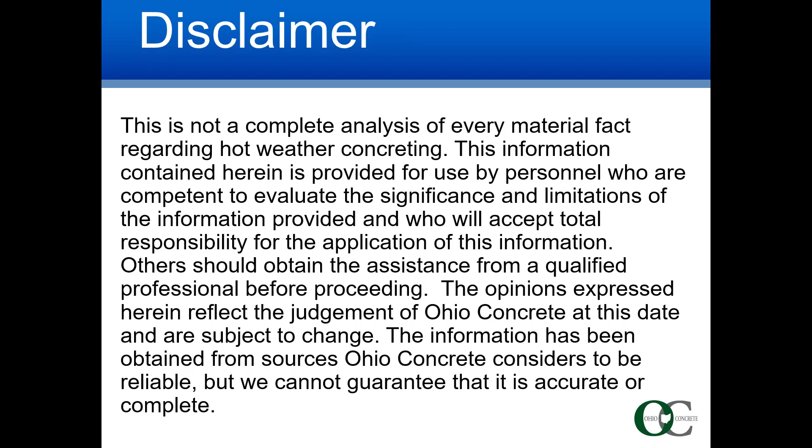The presentation will discuss the hot weather impacts for the producer, contractor, and tester, which is going to cover defining what hot weather concreting is, the effects of high temperatures on concrete, cooling concrete methods and mix design adjustments, project planning and best practices, finishing problems such as plastic shrinkage cracking and drying shrinkage cracks, as well as curing and protection, reduction of concrete strengths, and testing procedures.

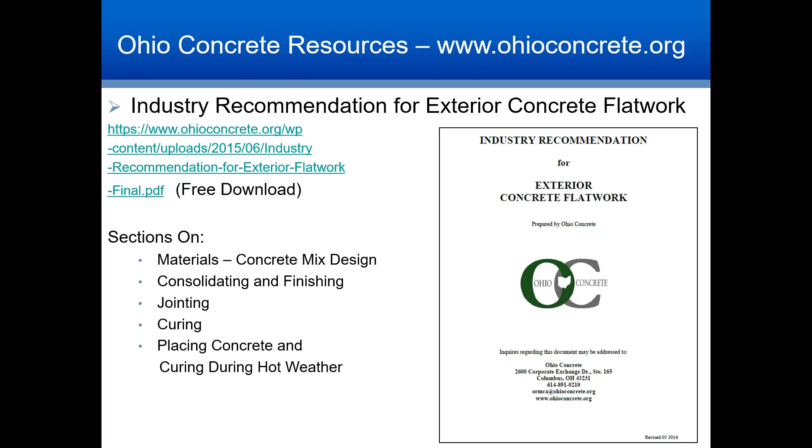Let's start with the how, when, and why hot weather is defined in contract documents. The first place to look is the project specifications, as this is the contract document which includes the requirements of the work. Often, concrete industry codes are referenced in contract documents, such as the ACI or American Concrete Institute codes 318 as well as 301.

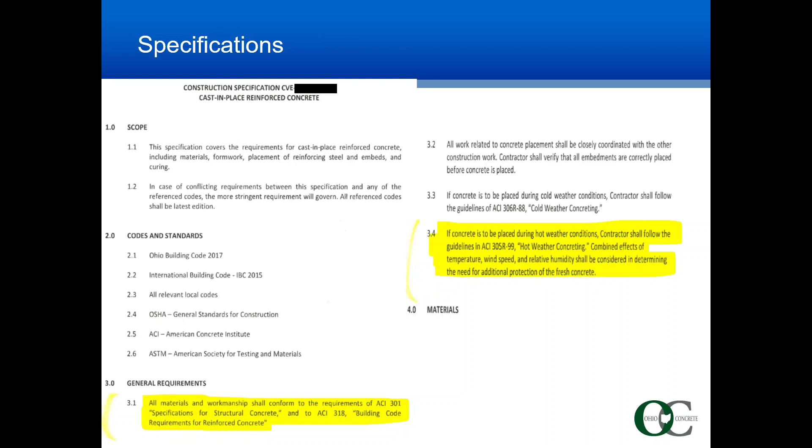There are hot weather provisions that are defined that further reference ACI 305.1, which is the specification for hot weather concreting. I'll now turn this over to Mark, where he will review ACI 305.1, which is the specification, as well as the report that further details hot weather concreting. Take it away, Mark.

Okay, thank you, Tom, and good morning to everyone. We'll be looking at ACI 305.1-14. This is the specification for hot weather concreting, and especially sections 1 and 3.

Section 1, general, includes a definition of hot weather concreting and submittal requirements. Note there is a requirement for a pre-placement conference 15 days prior to beginning concrete construction to review hot weather concreting properties. Attendance at this meeting shall include contractor representatives, subcontractor, testing agency, pumping contractor, the engineer of record, and the ready-mix producer.

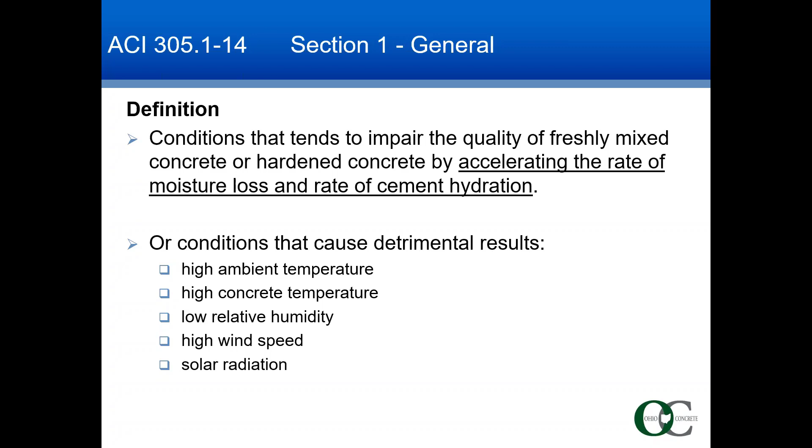Per ACI, the definition of hot weather concreting is conditions that impair the quality of fresh concrete or hardened concrete by accelerating the rate of moisture loss and the rate of cement hydration, or essentially conditions with high ambient temperatures, high concrete temperature, low relative humidity, high wind speed, and solar radiation.

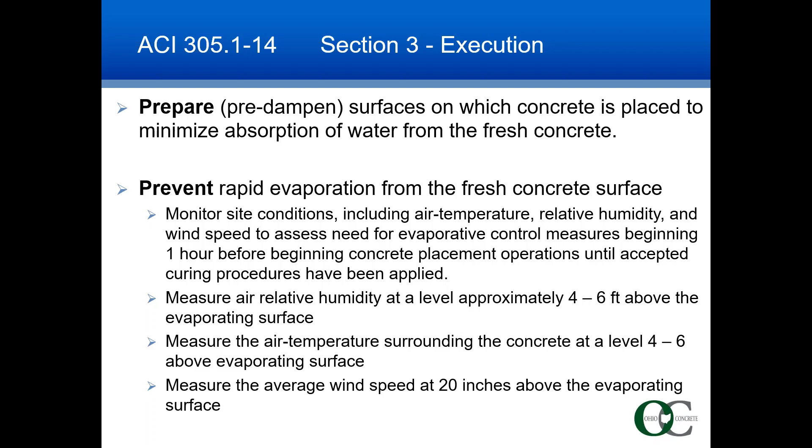In Section 3, Execution, ACI describes preparations, such as dampening the subsurface before concrete is placed, to prevent evaporation from the concrete surface, by monitoring the site conditions. They are air temperature, relative humidity, wind speed, and temperature of fresh concrete at time of discharge.

The maximum temperature of fresh concrete at the time of placement is 95 degrees, and this maximum has been adopted by ODOT specifications. The request for a maximum fresh concrete temperature exceeding 95 must be supported by pre-construction testing, shall require materials similar to those proposed for use on the project and under similar conditions.

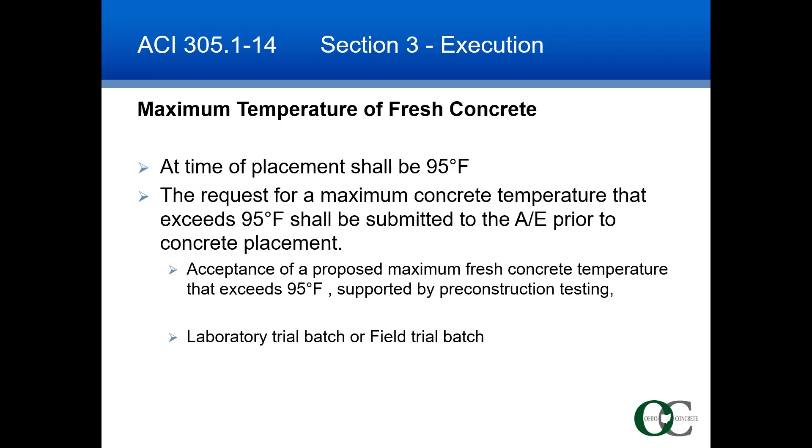Concrete production methods to reduce concrete temperatures include cooling the aggregate stockpiles, chilling the mix water, and in some extreme cases using liquid nitrogen.

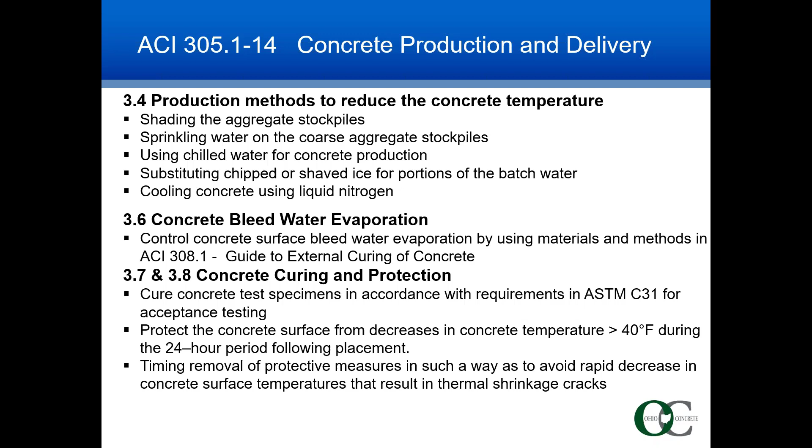Reference is made to ACI 308 Guide to Curing to control surface bleed water evaporation, and the curing requirements of standard test specimens for acceptance for ASTM C31, and protecting the concrete surface from rapid temperature decreases to avoid thermal shrinkage cracks. When the rate of evaporation of the bleed water exceeds 0.2 pounds per square foot per hour, precautionary measures such as windscreens or fogging are recommended.

Use the nomograph to estimate the surface evaporation rate. Enter with the air temperature, 85 degrees, move up to the relative humidity at 20%, and continue clockwise. Move right to the concrete temperature, 80 degrees, and down to the wind speed at 10 mph. Now move left and read the approximate evaporation rate.

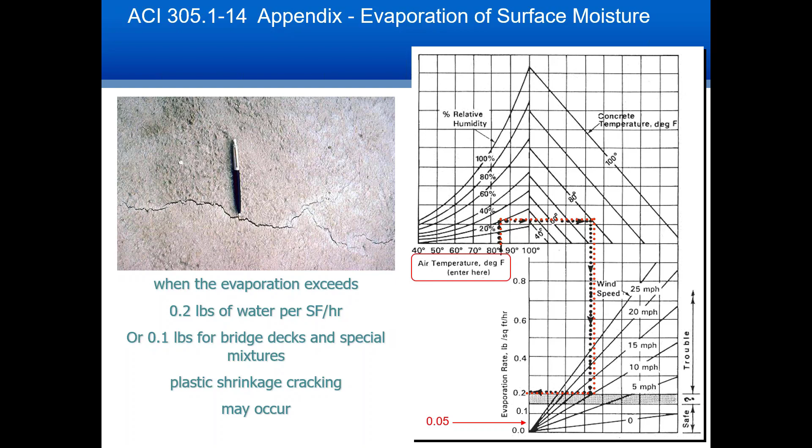With some concrete mixtures, such as those containing certain pozzolans, cracking is possible even if the evaporation rate is below 0.1 pound per square foot per hour. Concrete containing silica fume is particularly prone to plastic shrinkage cracks because of a lack of bleed water. Cracking can develop with evaporation rates as low as 0.05 pounds per square foot per hour.

A professional environmental meter allows one to measure the instantaneous evaporation rate rather than going by weather data from nearby stations. For example, wind gusts at a specific job site location may play a significant factor in the evaporation rate calculation. Data logs can be transferred to a mobile device wirelessly or to a computer.

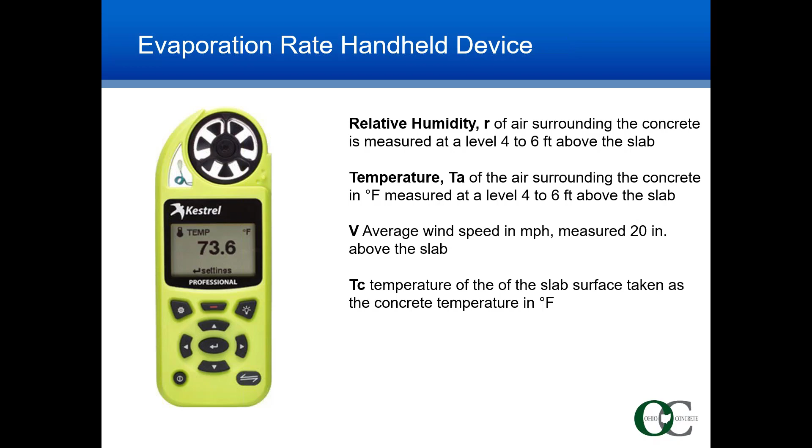This model has the ACPA evaporation rate nomograph built in and displays the evaporation rate on the screen with no calculations required by the user.

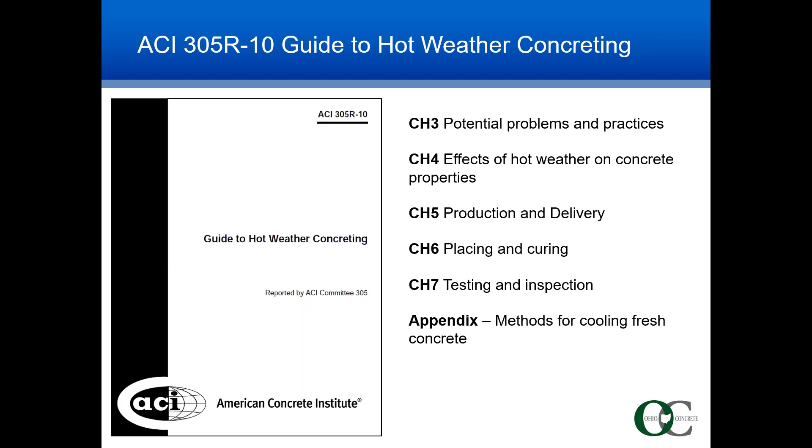Another important document is ACI 305R-10 Guide to Hot Weather Concreting. This report provides detail on potential problems and practices, effects of hot weather on concrete properties, production and delivery, placing and curing, testing and inspection. The appendix includes methods for cooling the fresh concrete.

Potential problems in hot weather: in the fresh concrete, there is an increased water demand, an increased rate of slump loss, an increased rate of setting, increased tendency for plastic shrinkage and thermal cracking, difficulty in controlling air entrainment, and reduced abrasion resistance.

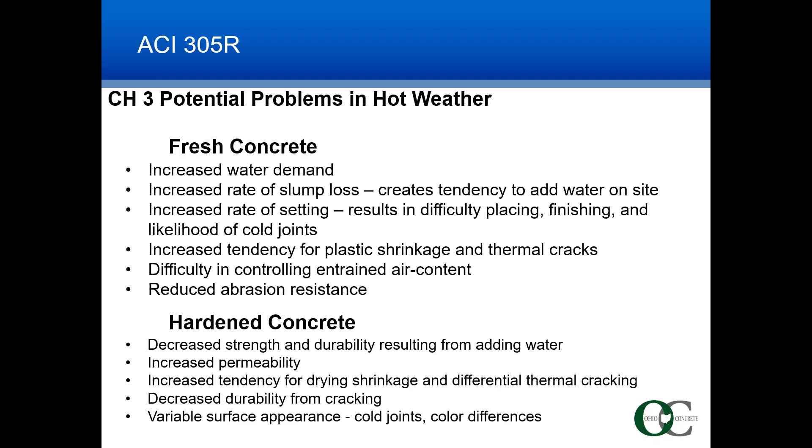In the hardened concrete, there can be a decrease in strength, decrease in durability resulting from additional water, increased permeability, increased tendency for drying shrinkage and differential thermal cracking, decreased durability from cracking, and variable surface appearances such as color differences or cold joints. Higher temperatures accelerate formation of cement bonds, but reduce the quality of those bonds.

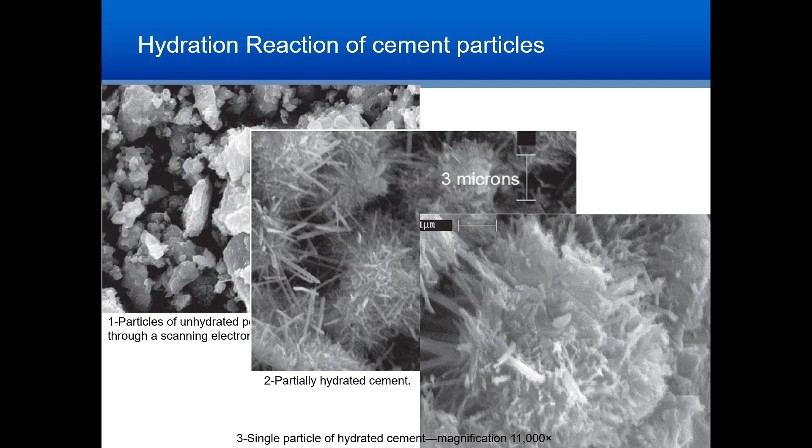These microscopic views depict different degrees of cement hydration. 1 shows particles of unhydrated cement, 2 is partially hydrated cement, and 3 is a single particle fully hydrated. Proper curing procedures ensure that sufficient water is available for the degree of hydration necessary to achieve the desired concrete properties.

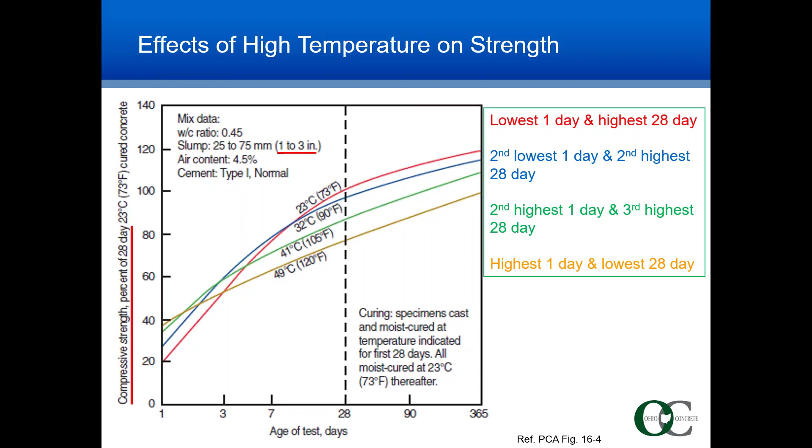The proper fabrication, curing, and testing of compression test specimens during hot weather is critical. Steps should be taken to assure ASTM C31 procedures are followed, specifically the initial curing temperature for test specimens.

Consider the batch water required to hold a 3-inch slump with increasing concrete temperatures. As concrete temperature increases, there is a loss in slump that often is compensated for by adding water to the concrete at the job site. At higher temperatures, a greater amount of water is required to hold the slump constant.

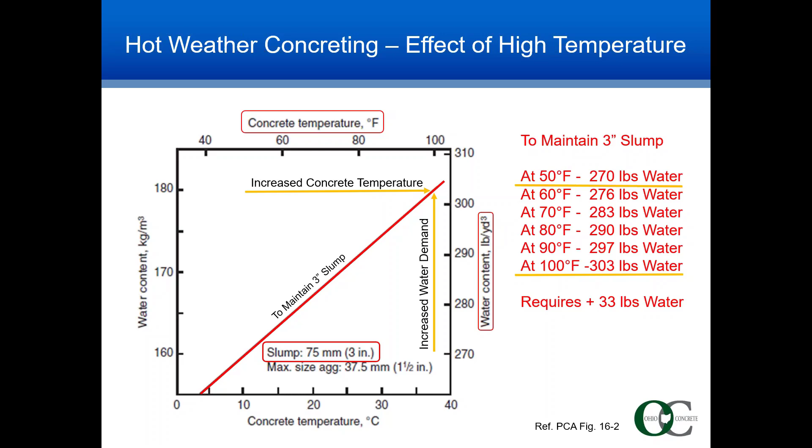High temperatures in fresh concrete increase the rate of setting and shorten the length of time for which concrete can be transported, placed, and finished. As a general rule of thumb, the concrete set time changes about 33% for every 10-degree change in the initial concrete temperature.

Air entrainment is also affected in hot weather. At elevated temperatures, an increased amount of air entraining admixture dosage is required to maintain a given air content. Concrete that contains slower setting cements is more likely to exhibit plastic shrinkage cracking if not protected. The cement content shown should be kept as low as possible, but sufficient to meet strength and durability requirements.

The inclusion of fly ash or slag cement should be considered to delay setting time and mitigate the temperature rise from heat of hydration. Water-reducing admixtures can offset increased water demand and strength loss that could result from higher concrete temperatures.

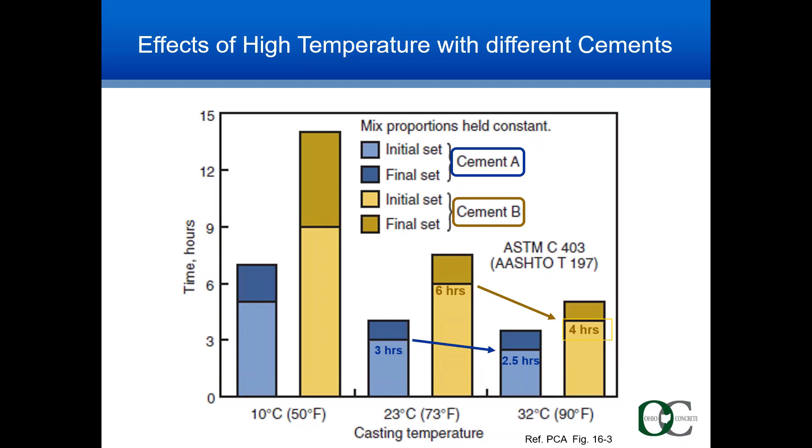The usual method of cooling concrete is to lower the temperature of the concrete ingredients before mixing. The aggregates have the most pronounced effect on concrete temperature because they represent 70 to 80% of the total mass.

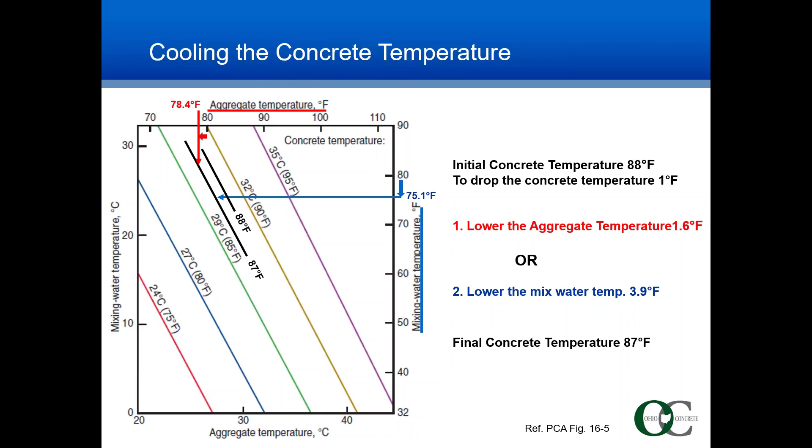This graph shows the effect of aggregate and mixing water temperatures. For example, assume the initial concrete temperature is 88 degrees. The ingredients are cement at 150, aggregate at 80 degrees, and water at 80 degrees. To drop the concrete temperature 1 degree, you could either reduce the aggregate temperature 1.6 degrees or reduce the mix water temperature 3.9 degrees Fahrenheit.

Methods of cooling fresh concrete include: A, sprinkling water on the aggregate stockpiles; B, cool misting the drums; C, crushed ice charged into the truck mixer; and even D, liquid nitrogen being added directly into the central mix drum or the mixer drum. What about the mixer drum color?

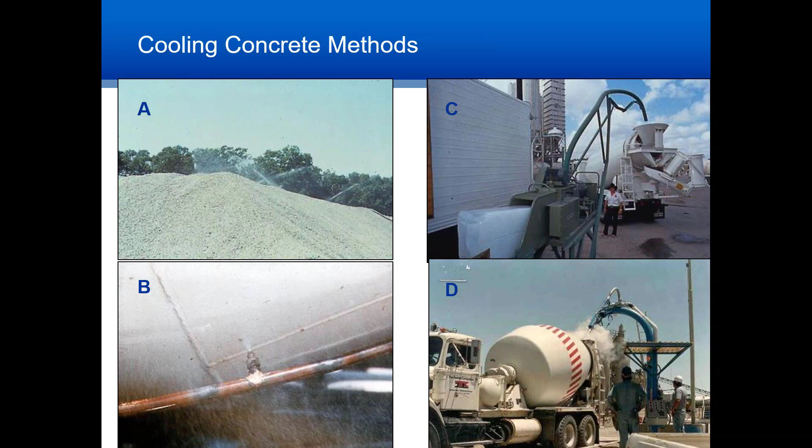Lighter mixer surfaces such as white minimize solar heat gain, which helps reduce the concrete temperature. Based on a 1-hour delivery time on a hot, sunny day, concrete in a clean white mixer drum should be 2 to 3 degrees cooler than in a black or red mixer drum, and a half degree cooler than in a cream-colored drum. Another rule of thumb: in order to reduce the temperature of fresh concrete 1 degree, reduce the aggregate's temperature by 1.6 degrees, or water by 4 degrees, or cement by 9 degrees.

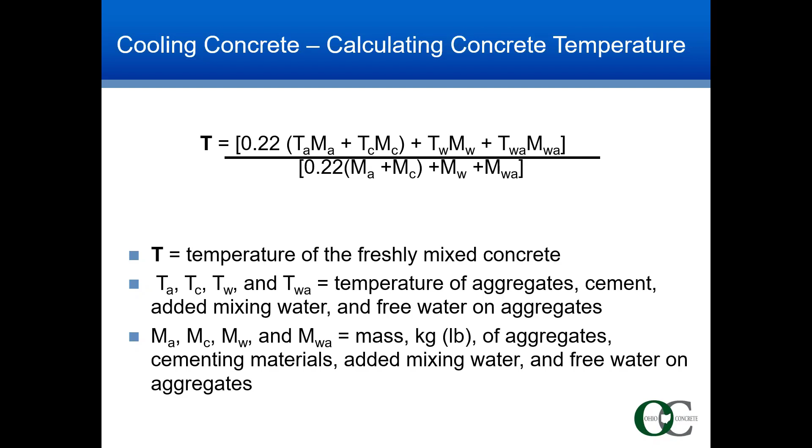The approximate concrete temperature can be quantified from the temperatures of its individual ingredients using this equation, where T is the temperature of the fresh mixed concrete, and the T's with subscripts are the temperatures of the individual materials: aggregates, cement, added mixing water, and free water on the aggregates. The M's represent the mass of these individual ingredients.

Heat generated during cement hydration raises the temperature of the concrete to an extent that depends on the cement content. As a general rule, cement hydration temperature rises 5 to 15 degrees for every 100 pounds of cement. At 96 degrees, for example, cement is hydrating at 2 times the typical laboratory rate at 73 degrees and will cut the set times in half.

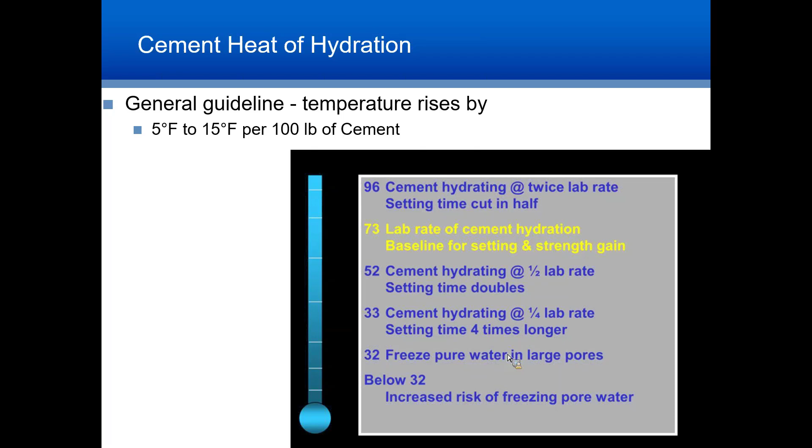Batch plant applications: select materials and mix proportions that have proven performance, such as lower cement contents and set retarding admixtures. Cool the concrete or one or more of its ingredients; coarse aggregates will have the greatest impact. Use a concrete slump that allows rapid placement and consolidation, which likely requires a plasticizer. Add fibers to the concrete mix.

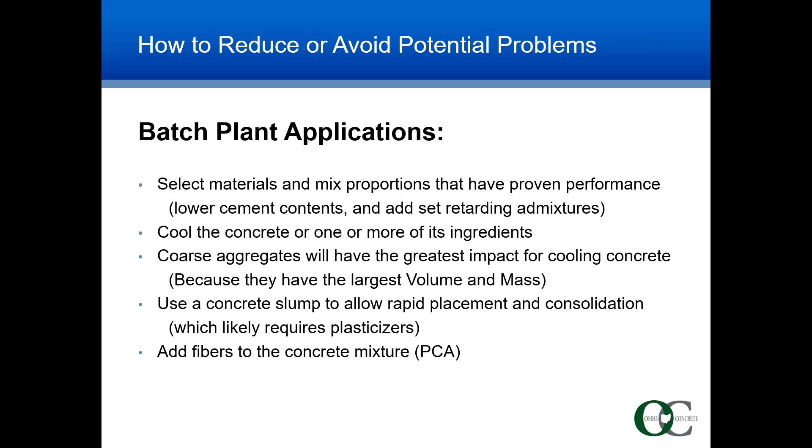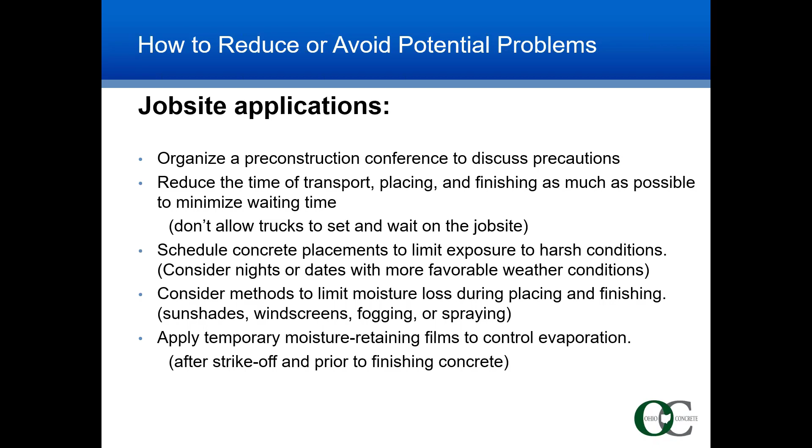Job site applications: organize a pre-construction conference to discuss the precautions. Reduce the time of transport, placing, and finishing. Minimize waiting time; don't allow trucks to sit on the job site. Schedule concrete placements to limit exposure to harsh atmospheric conditions, considering nights or other dates. Consider methods to limit moisture loss during placing and finishing, such as sunshades, windscreens, fogging, or evaporation spraying. Apply temporary moisture retaining films to control evaporation after strike-off and prior to finishing. Schedule placements when walls and roof structures are in place.

What is wet curing? Well, what is curing? First of all, it's the maintaining of an adequate moisture content and temperature in the concrete at early age so it can develop properties the mixture was designed to achieve.

Don't let it dry out for at least 3 days. Apply curing immediately after finishing. And there is the greenhouse effect caused by plastic sheeting, which can result in visible discoloration streaks.

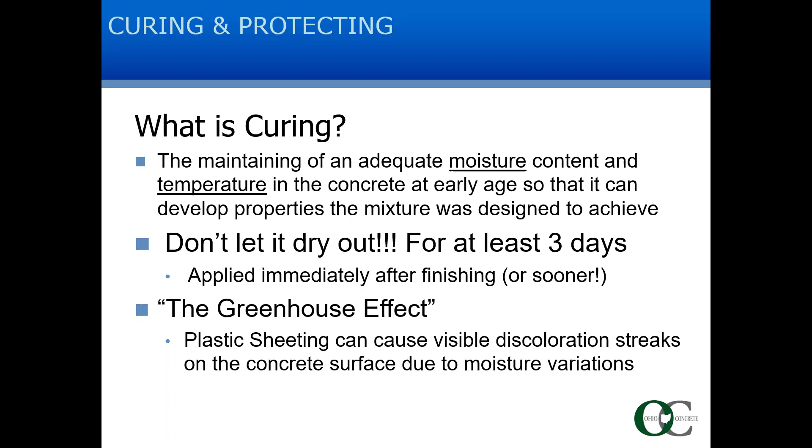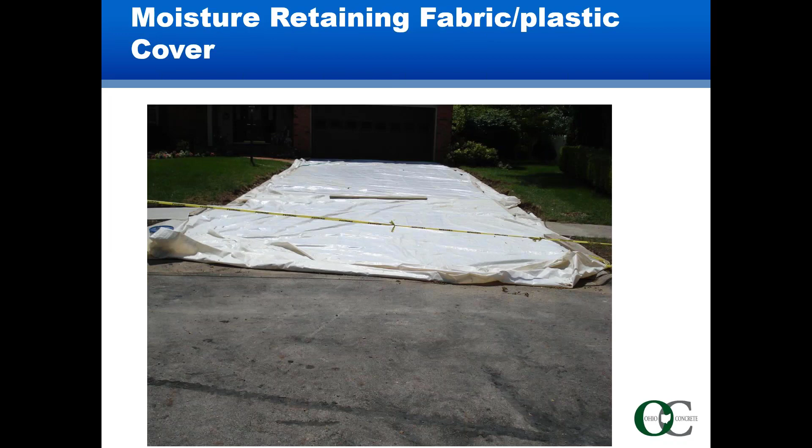Wet curing, however, is the most desirable type of curing, but not always practical. Plastic sheets with soaker hoses is a good option. White fabric covers keep the moisture in and reflect the solar heat. Use a white pigmented reflective compound where concrete will be exposed to the sun.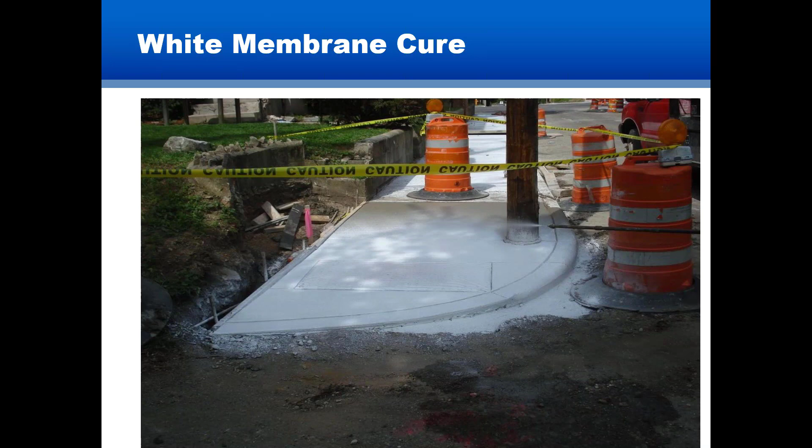Coverage should be thick enough so that it's not spotty. Apply curing compound immediately after finishing. Be sure to coat all exposed areas, including edges.

The need for moisture curing is greatest during placement and the first few hours after finishing. Curing water should not be more than 20 degrees cooler than the concrete itself. Otherwise, cracking can result from thermal stresses due to temperature differentials between the concrete and the cure water.

Continuous moisture curing for the entire curing period is preferred. However, if moisture curing cannot be continued beyond 24 hours, while the surfaces are still damp, the concrete should be protected from drying with curing paper, heat-reflecting plastic sheets, or membrane-forming curing compounds. If this is not practical, a curing compound should be applied immediately after final finishing to keep the concrete surface moist. Avoid repeated wetting and drying of the concrete surface.

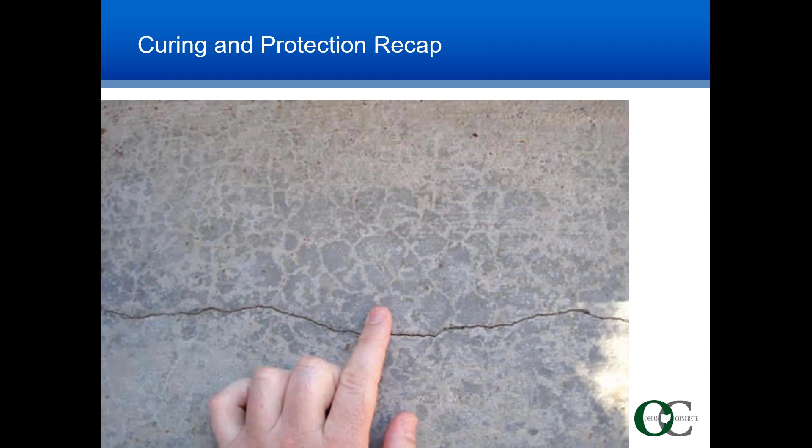Crazing is a pattern of fine cracks, shown here, that do not penetrate much below the surface and is caused by minor surface shrinkage. To prevent crazing, start curing as soon as possible.

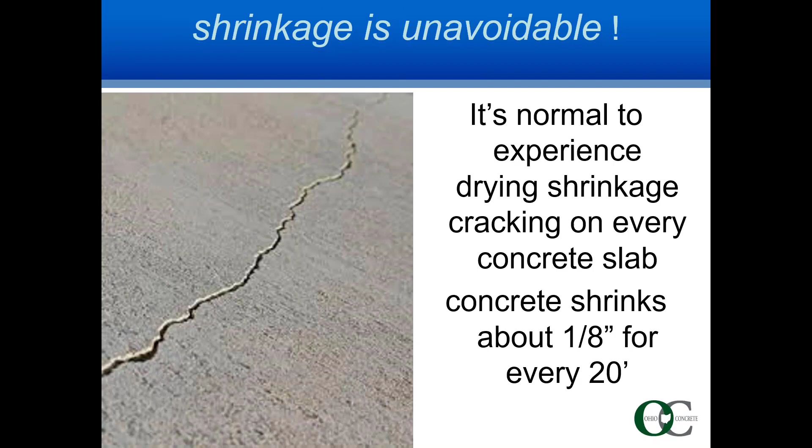How to minimize the risk of unanticipated cracks. Well, shrinkage is unavoidable. It's normal to experience drying shrinkage cracking on every concrete slab. Concrete shrinks about 1/8 inch for every 20 feet approximately. All concrete shrinks, and as concrete shrinks, it cracks.

So we plan for this by using isolation joints and contraction joints to accommodate shrinkage as the concrete volume changes. A restraint mechanism that prevents the concrete from shrinking results in a crack. A random crack is merely one that occurs outside of the planned joint.

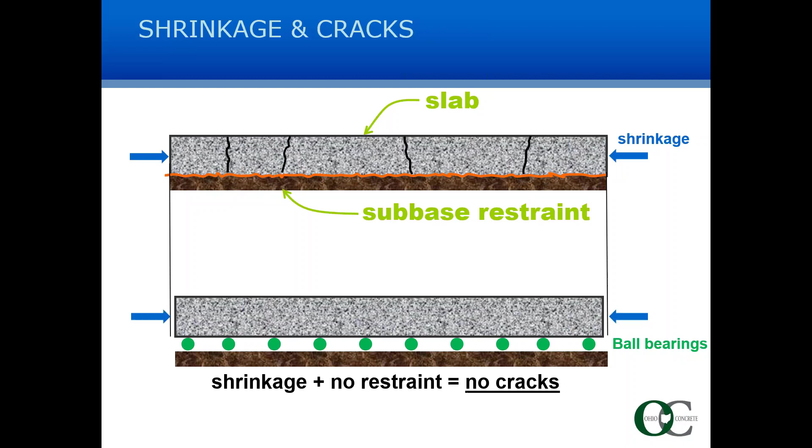In general, use concrete with a moderate slump, not over 5 inches. Avoid retempering concrete to increase the slump before placement, as this will increase shrinkage. Start curing as soon as possible to prevent rapid drying shrinkage.

Plastic shrinkage cracking is usually associated with hot weather concreting. However, it can occur anytime ambient conditions produce rapid evaporation of moisture from the concrete surface. Plastic shrinkage cracks sometimes occur in the surface of freshly mixed concrete soon after placement, during finishing, or shortly thereafter. These cracks occur when water evaporates from the surface faster than water can travel to the surface during the bleeding process. This condition creates rapid drying shrinkage and tensile stresses in the surface that often result in short, irregular cracks.

The following conditions, individually or collectively, increase evaporation of surface moisture, increasing the possibility of plastic shrinkage cracking: high cementitious contents, low water-cement ratios, high concrete temperatures, high air temperatures, low humidity, and wind.

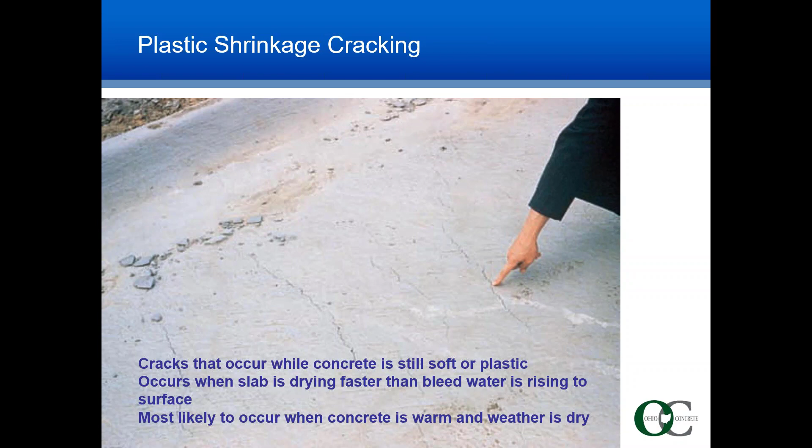How to minimize plastic shrinkage cracking: provide proper equipment and manpower, fogging and misting, or using evaporation retardants. Dampening the subgrade. Setting up wind barriers. Using synthetic fibers. And adjusting the set time to minimize plastic shrinkage cracking.

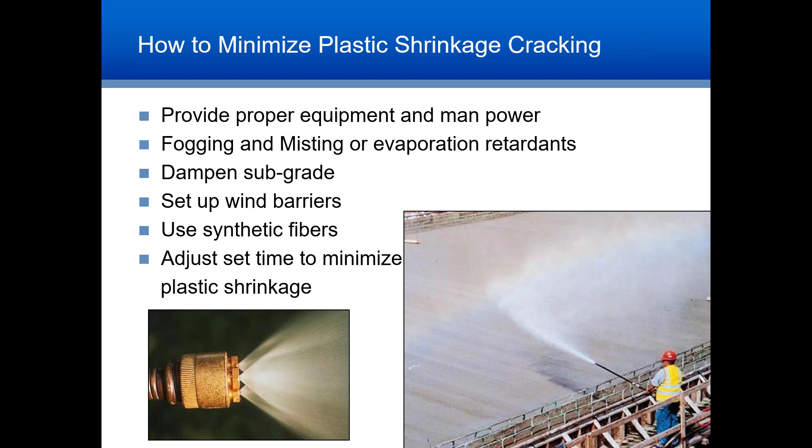As has been presented, temperature has a major effect on setting time of concrete. Concrete placed under elevated temperatures will set more rapidly and therefore need faster finishing. This also has a pronounced impact on strength, where early strength of concrete is higher, but later, say 28-day strength results will not be as high as concrete cured at around 70 degrees Fahrenheit.

It's therefore critical that concrete placed during hot weather is cured as quickly as possible. Curing needs to be continuous and, as Mark had said, for at least 3 days. Covering the placement with water, wet burlap, plastic sheeting, or liquid membrane curing compound. The benefit of using a white pigmented compound not only allows an indication of the coverage, but it also reflects the heat from the surface, from the sunlight.

Also, any test specimens that are cast need to be protected and stored under proper temperatures as required for ASTM C31.

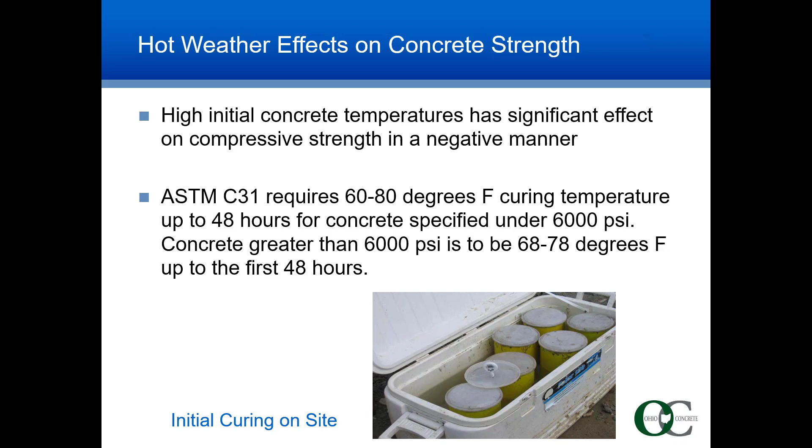Let's go ahead and take a look at concrete specimens. For ASTM C31, there are really two different purposes for casting field specimens. One test is to determine the strength potential for the concrete as it's been delivered to the job site, and the other is for determining the strength of the concrete in place at a given time. Both tests are covered under C31, and the one big difference between the two test procedures is the method of curing required for these specimens.

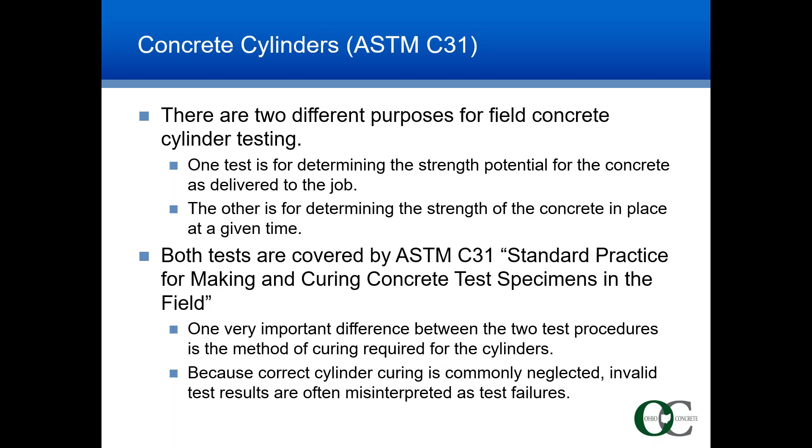Because correct cylinder curing is commonly neglected, invalid test results are often misinterpreted as test failures. So let's take a look first at the standard cured specimens. The first purpose of the cylinder testing is really to confirm that it meets the project specifications for strength.

That is, concrete that is delivered to the job site will meet the design strength, which is typically at 28 days. This procedure requires that those specimens that are cast remain on the job site for at least 24 hours, typically no longer than 48 hours, and they're stored in a temperature environment between 60 and 80 degrees Fahrenheit when the concrete strength is less than 6,000 psi, or at a higher temperature, 68 to 78 degrees Fahrenheit, for strengths equal to or greater than 6,000 psi. But again, the key here is that we're keeping those specimens in that set environment.

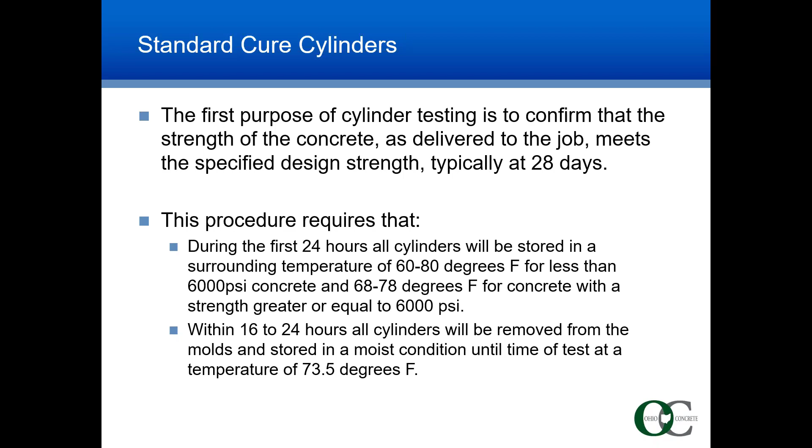Then within 16 to 24 hours, the cylinders, or certainly no longer than 48 hours, are removed from the job site, taken back to typically the lab, where they're demolded and stored in a moist condition, in a moist cure room or a cattle tank of lime water, at a temperature of 73.5 degrees Fahrenheit in a very standardized method.

Now, field cured specimens are for a different purpose. This is to confirm that the concrete that has been cast on the project site is strong enough for the next step to occur on the project, whether that is putting the concrete into service, whether contractors can start traveling equipment on it, or really getting to the next sequence of their construction cycle.

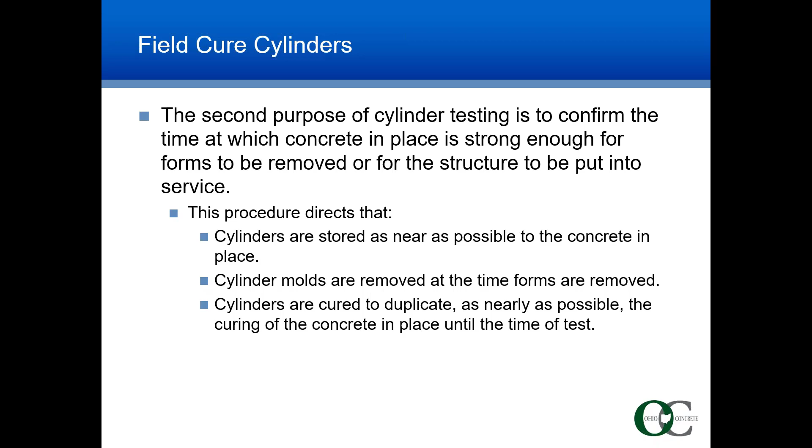So these cylinders are protected in or as near as possible to the concrete as placed. The molds are then removed at the time the forms are removed. So really, we're trying to duplicate the concrete specimens being under the same condition, or nearly the same condition, as the concrete that's placed at the job site. So two very distinct reasons why we are casting specimens.

Let's recap some of the items we've covered on hot weather concreting. Warm, moist conditions are actually ideal for durable, strong concrete. We want to enhance and create hydration of the cement. However, when we get into hot, dry, windy conditions, they can create problems.

As we've detailed, some of the solutions include cooling the ingredients that make up the mix, using mixes that have been adapted for high temperatures. Those include using supplementary cementitious materials such as fly ash or slag cement, or using liquid retarders.

The consistency also needs to allow for rapid placement and consolidation. Transport, placement, consolidation, and finishing with the least amount of delay. Maybe trying to reduce the exposure during hot weather, starting early in the morning or placing at night. Very common for the bridge decks here in Ohio.

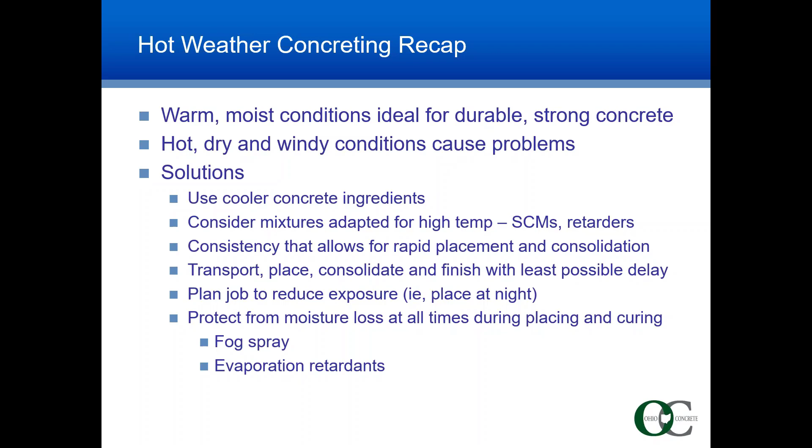Protect this placement from moisture loss at all times during placement and curing. This includes fog sprays and evaporation retardants.

Some conclusions: placing, finishing, and curing of concrete is not an exact science. There need to be adjustments for the placement. We understand that the contractor is at the mercy of the weather, and every day is essentially different. Therefore, concrete mixtures as well as placement procedures will need to be modified for that particular day's placement.

Curing is essential to quality concrete. Sometimes we need to apply intermediate curing, done with either fog mist or evaporation retardants during placement, so we don't allow that top surface to dry out. Then place final curing as soon as possible after all finishing is done. Also, specimens that are cast for job site acceptance need to be placed under the conditions of ASTM C31.

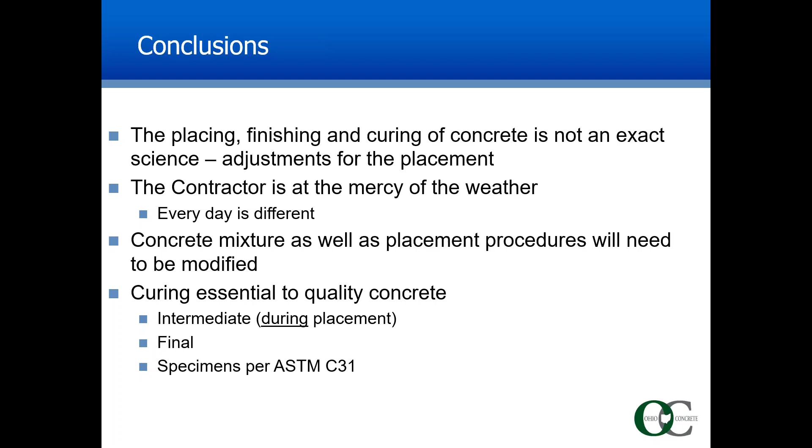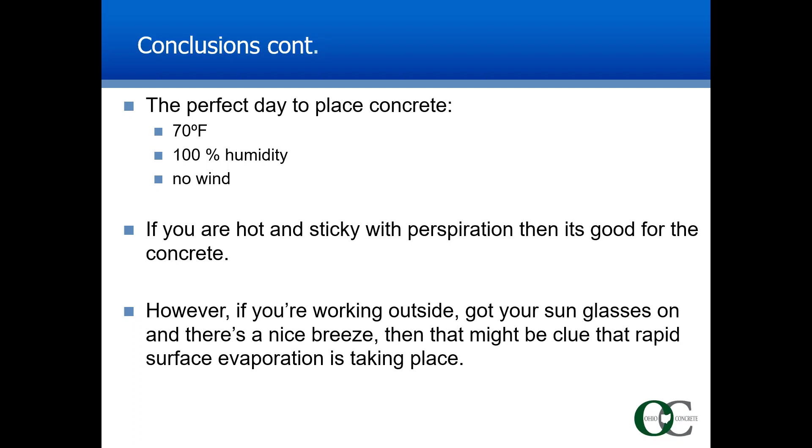The perfect day to place concrete is 70 degrees Fahrenheit, 100% humidity, and no wind. Well, we don't have many of those days in Ohio, so we do need to make exceptions and modifications. Consider this: if you are hot and sticky with perspiration, that's typically a good day for concrete. However, if you're working outside with sunglasses on and there's a nice breeze, that might be a clue that rapid surface evaporation is taking place and precautions need to be taken.

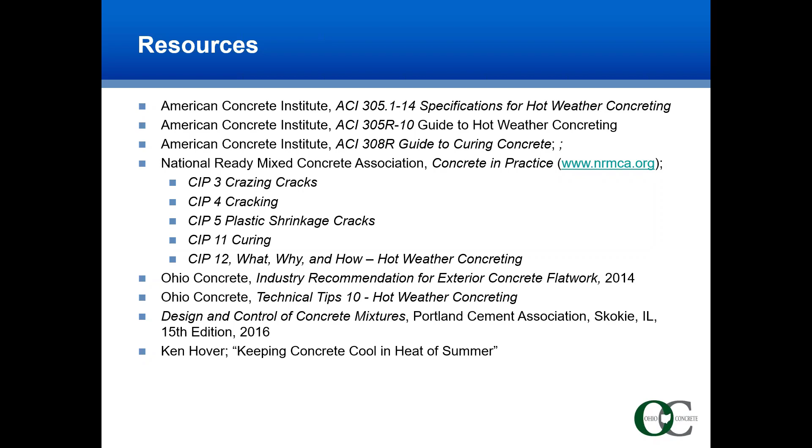Provided are some of the slides. In the slides, we used some industry sources such as American Concrete Institute, National Ready Mixed Concrete Association, FHWA, Portland Cement Association, and those which we've created here in-house at Ohio Concrete. There's also a really good article that Ken Hover placed in a structures magazine called Keeping Concrete Cool in the Heat of Summer.